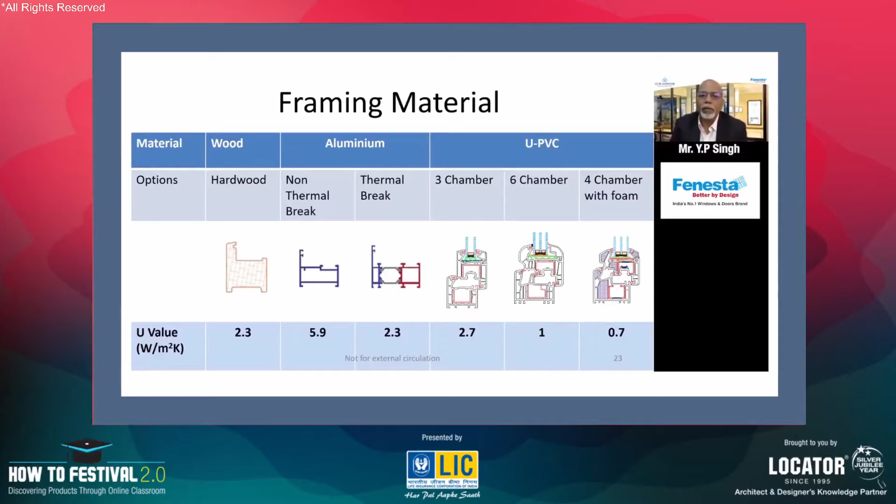Lower the U value, better is the insulation. So keep that in mind. Now, if you look at wood, which is at 2.3, you get thermal break material in aluminum also at 2.3, and you get 3 chamber close to 2.7. Of course, you can go lower by adding chambers or adding foam, but that's what you are aiming at. In Europe, particularly where they are looking for very high insulation, they go for 6 to 7 chambers as well.

We'll talk about some of these innovations at Fenesta. The first one is we have a special rain track and sill arrangement to prevent water seepage through slider systems.

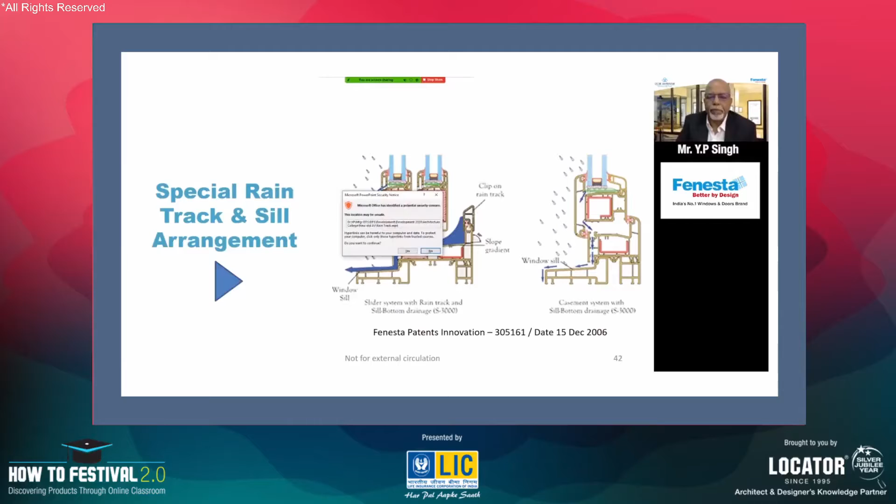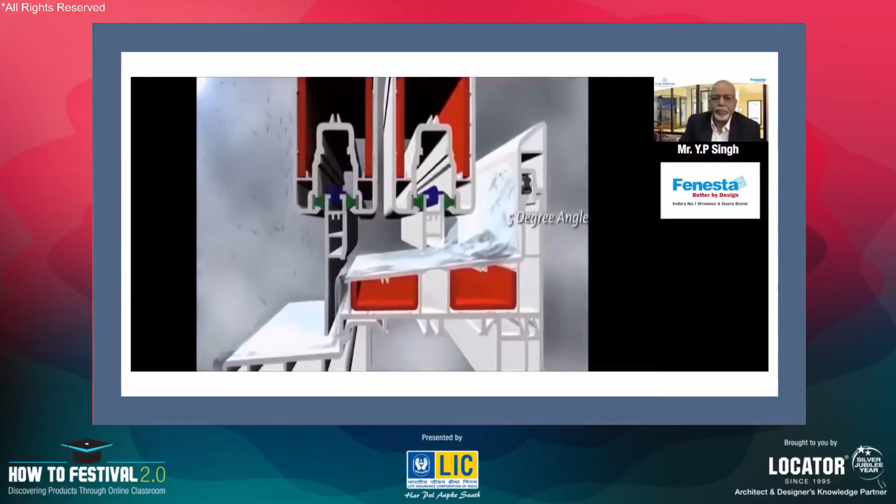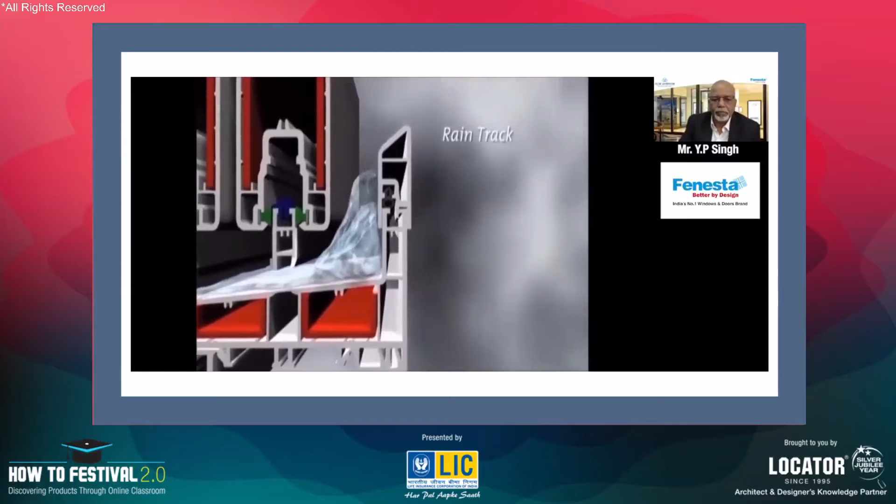Fenesta windows come with both watertight sealing and special monsoon-proof innovation. For heavy shower areas, Fenesta offers sliding windows with a special rain track, dam-like system, which locks out the rains completely and prevents it from seeping indoors. Whereas for light shower areas, a sill arrangement is recommended, which resists air pressure and makes the rainwater flow outwards without staining the walls.

As we have designed and manufactured the product, installation is the most critical aspect because this is done at the field with less supervision, but with a trained set of skills. If the installation is not correct, irrespective of how good the design is or how good you have manufactured, the windows will not perform. Therefore, due care in the installation process has to be taken.

Fenesta has been doing its own installations from day one, and the main reason is that installation actually delivers the performance of the product. Let's have a look at this.

The other is installation. 85% of all window-related problems spring from poor installation. At Fenesta, dedicated teams of trained professionals coordinate the complete installation process.

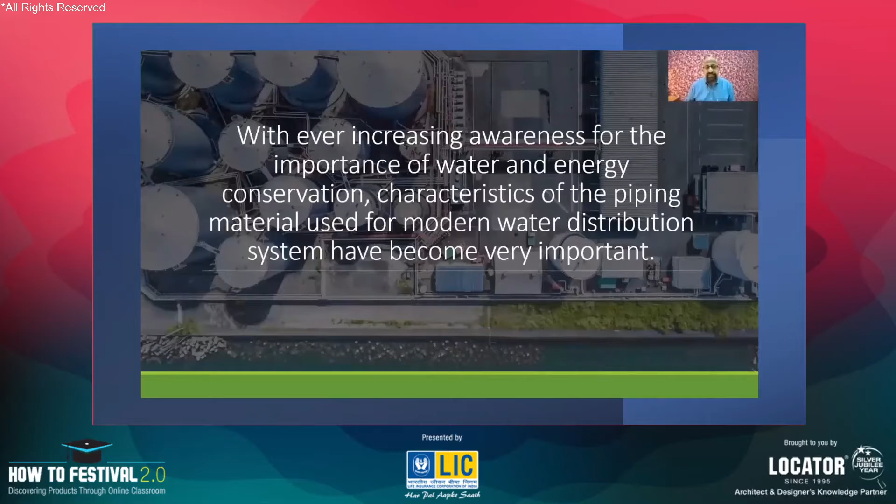There are a lot of ways that traditionally water pipes are used for transport of water. Namely three: GI, copper, and plastic, and a few others. Mostly it's GI. GI is the product of choice, and this is the one you'll probably find in your homes and use in your university, in your college, virtually everywhere. That's because it is the one pipe which has been made available for the longest time all over the country.

Copper is another option which used to be used in the Baba Adam days, in the British days, because it was freely available and less expensive. Today it's prohibitively expensive. It's a great product to use for piping, but it's simply not affordable in projects. And there is plastic, which is very affordable, but as with anything, it has its major disadvantages of being brittle and prone to breaking, cracks, breakages, and all kinds of other problems such as not being able to take hot water applications easily, and so on.

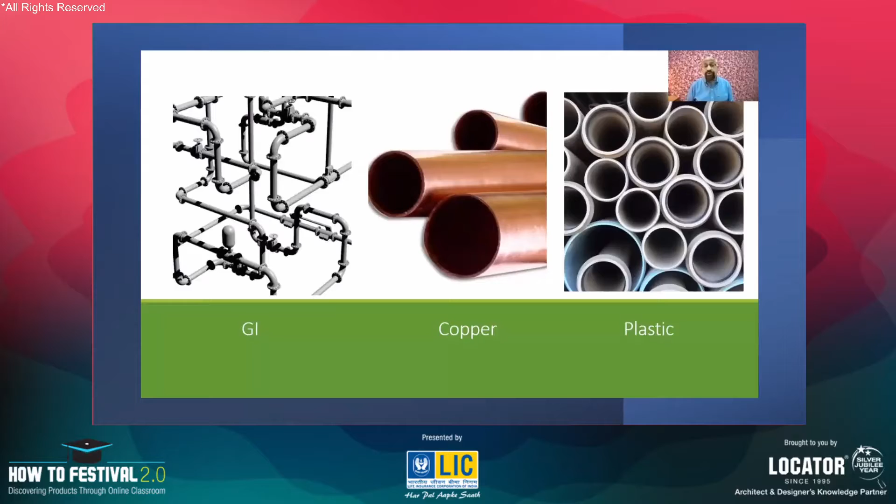All of these main products which have been used have got limitations because GI pipes tend to corrode. GI pipes come in fixed lengths of a few meters. They have to be cut to size, measured, threaded, wound, and the angles and joints have to be put together. It's labor intensive, and at the end of the day, they're prone to leakages from those very joints, which have been sealed using tape or sutli. Remember how plumbers do their work with white cement and so on. And they have all got limitations.

So that's why I think you need to know about this revolutionary system that combines the features of both plastic and metal, the composite piping system from Kitec.

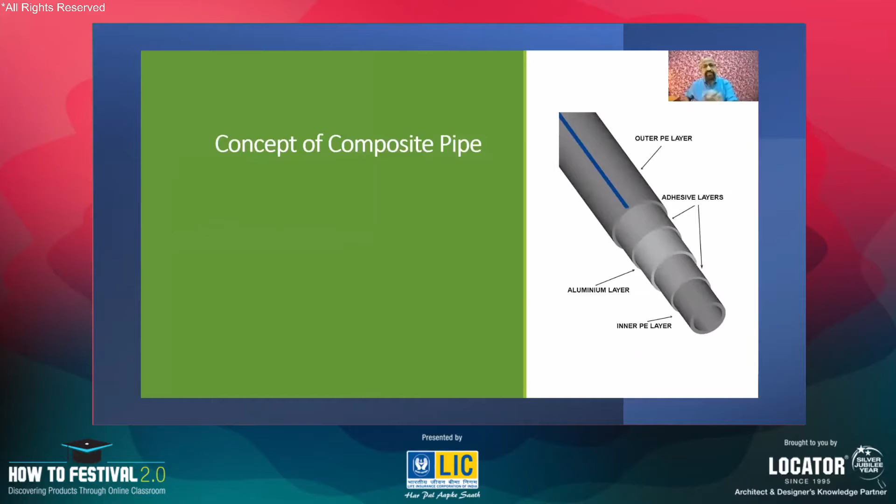What is the concept? Here you see 5 layers. There's an outer PE layer, there's an inner PE, PE being polyethylene, and in between there's an aluminum layer. There are 2 more layers between the outer PE and the middle aluminum - an adhesive layer - and between the middle aluminum and the inner PE, there's another adhesive layer. So Kitec is an aluminum polyethylene composite that combines the best features of both materials to form a pipe that is light, strong, and does not support corrosion.

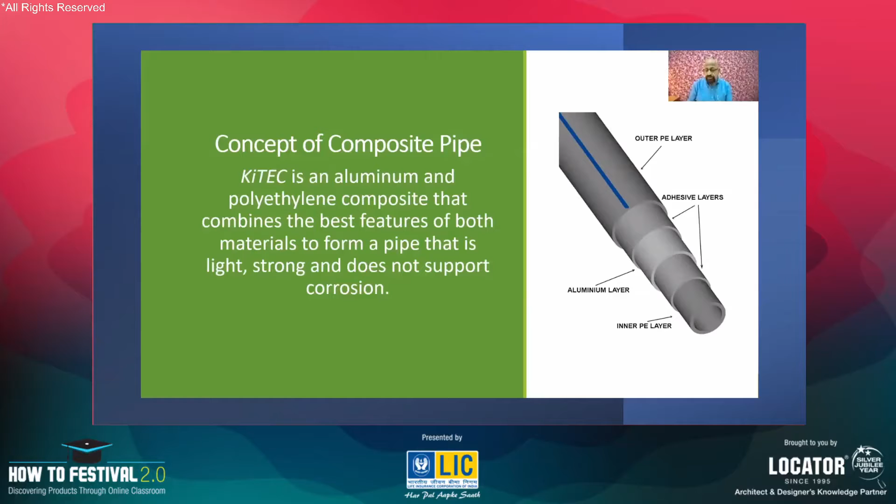It is potable water certified. Potable water is drinking water. We all know that all over the country, you're either finding people with so-called mineral water, which is basically treated, filtered water, bottles in their hands, or you've got AquaGuard kind of water purification systems at home and even in institutions. Why is that so?

The reason is very simple. The groundwater is not so contaminated - even if it's from the lake or rivers, it gets treated in a plant - but it's during the transport from the pumping station to the end delivery point, which could be a building going up to many flats, that contamination becomes possible. How does this happen? Sewage pipes and drinking water pipes are normally laid together in the same trenches. This is how cities were constructed.

So when there's a leak from one or the other, because of those joints I mentioned earlier, because of the corrosion of those joints, because over a period of time they weaken, dirty sewage water goes in, which is why at the delivery point you're not advised to drink water off the tap. Go to all advanced international countries which have these kind of sealed systems, and they drink water off the tap because it isn't contaminated.

KiTEC pipes use PE that is food grade certified and hence suitable for water supply to and inside the building. So if you have applications in the future like hotels, hospitals, colleges, etc., this danger is real, and that is where one needs to be careful to ensure there is no contamination of drinking water, which can be avoided if you use KiTEC composite water piping systems.

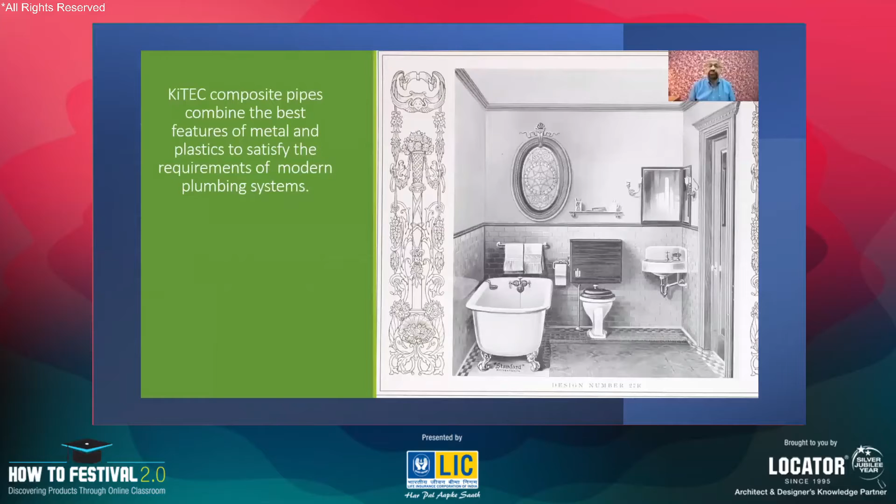So, more or less concluding, KiTEC composite pipes combine the best features of metal and plastics and satisfy the requirements of most modern plumbing systems. There's a wide range of municipal DZR brass fittings and engineering plastic composite fittings available to connect KiTEC water service pipes. Let me show you something interesting. This is a range of fittings which have been developed indigenously, vocal for local. It has been made by KiTEC, and it includes composite, brass, and other metals, O-rings and whatnot.

None of this is important to you. Suffice it for you to know that unlike the normal metal GI pipe, where we talked about cutting lengths, there being some wastage, threading after measuring the lengths to which it has to be taken, then fitting the elbows and so on, KiTEC composite piping systems are literally fitted. Because of these fittings, they are airlocked. They don't need adhesive, they don't need rope, they don't need threading, they don't need sutli, they need nothing. They are snap shut, and that entire project is tested with compressed air before water is allowed to flow through the system. And that is how you can say you can fit it and forget it for life.

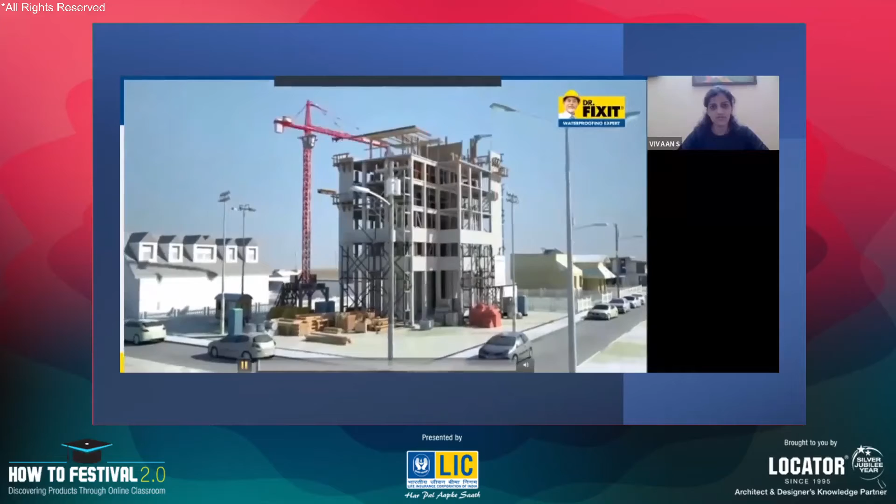It takes years of design and planning to construct a strong building. Unfortunately, not much has changed about waterproofing. Conventional methods like brick-bat coba and China mosaic are often considered sufficient, but weather can be unforgiving.

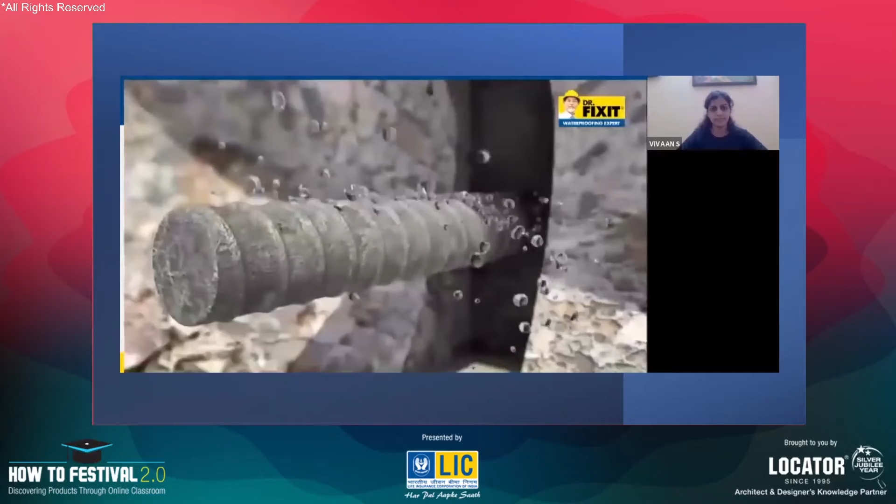Rapidly changing weather and temperatures throughout the day put a lot of stress on the building. This harsh weather adversely impacts the concrete structure and weakens the building. Water can be an extremely destructive force. It can slip through the tiniest cracks, cutting its way through every crevice that could be found, percolating through the concrete and destroying everything in its path. And when it enters a house, it damages the ceiling, walls, floors, and the interiors. But it is possible to stop all this damage from happening.

So these are the waterproofing principles and facts related to this. When we consider the life cycle analysis of the structure, it has a principle called the 2-80 principle. The 2 stands for the 2% that is the total waterproofing material cost of your total project cost. That much is your requirement at the initial stage itself. But if we do not consider this at the initial stage, it leads to 80% cost for the repairs of the project during the service span of the building. And 18% is related to other factors.

Similarly, as a life cycle analysis, we should also have a failure analysis of the waterproofing systems. This also has a principle—the 2-90 principle. Here again, the 2% remains for your waterproofing system material selection, and 90% is the application of these materials. So this is important—both the system material selection and their application—and 8% is for other factors. This gives you the overall idea about waterproofing practices, their principles, their life cycle, and the cost analysis of the project itself.

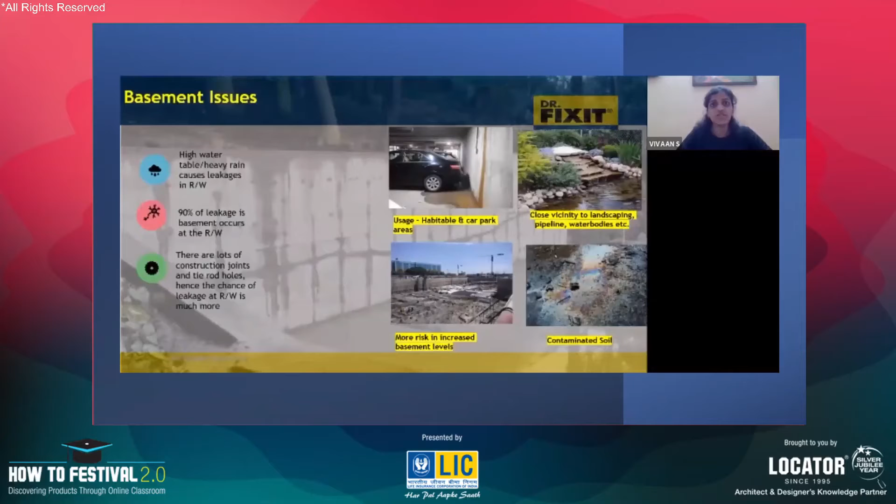It all leads to basement leakages and dampness problems inside buildings. To protect basement structures, proper waterproofing should be done at the design stage itself with the proper system selection. First we have to understand the purpose for which we are going to use the basement—what is the grade of the basement usage? Are we going to use it for car parking, storage, or plant room areas? Depending on the grade of usage, the nearby soil condition, and the water table condition, it has to be derived into 3 categories.

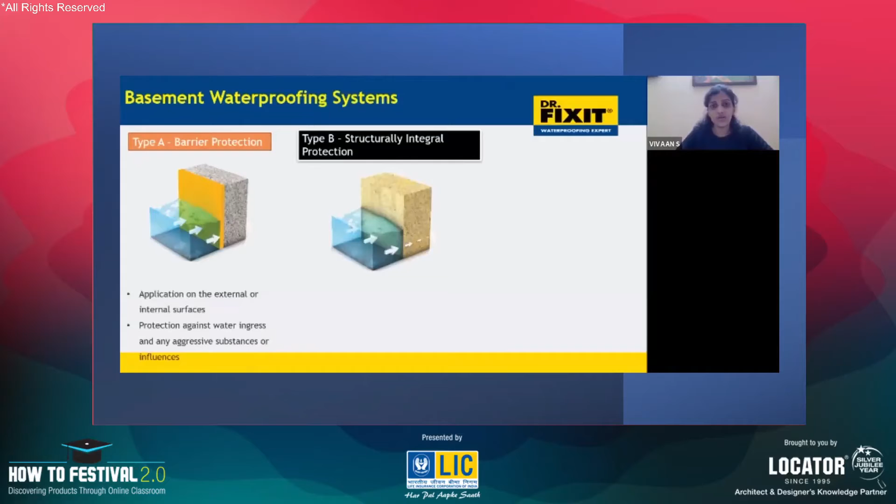One system is called the Type A barrier protection system. In this waterproofing system, the material has to be applied either from the external or the internal side of the concrete mass. The second category is called structurally integral protection. This is nothing but making your concrete waterproof—we add integral waterproofing compounds inside at the time of making the concrete.

And the third category is drained protection. Here we provide drainage boards inside the basement from the internal side, so that water will percolate and be stored at the drainage board, and we collect it from a sump at one location on the project site. So as per the basement grade, usage and water table conditions, these three categories can be combined or used singly on the projects.

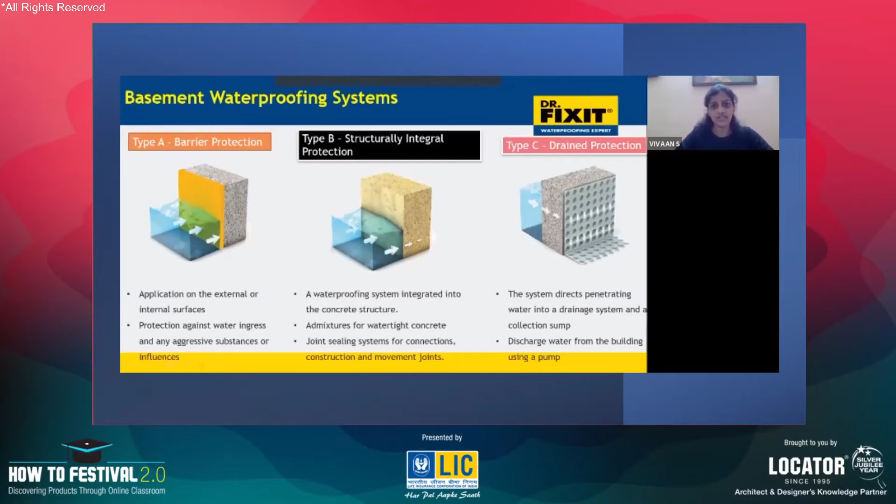Let's see about podium waterproofing. As podium itself is a big subject, we are going to use this as we have various utilities over here, each with their associated problems.

We use the podium substrate where you have various loading coming due to expansion and contraction, and the concrete slab gets crack formations. There are also other utilities like water bodies and planter boxes. In planter boxes or landscaping, plant roots also penetrate inside the concrete mass. We also use this as hardscape for car parking areas. So these are the utilities.

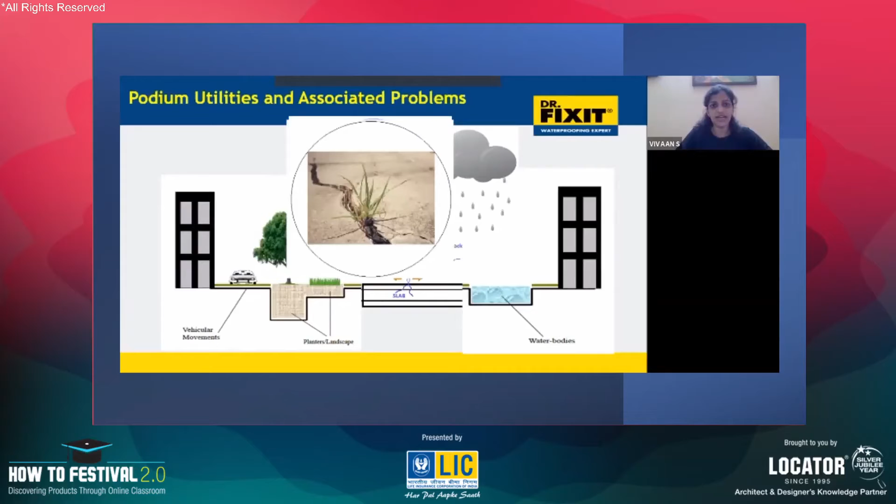To cover all these utility points, the system has to address all these utilities at one go and their problems at the initial stage itself. So for the hardscape system, the waterproofing membrane has to take care of good tensile properties, adhesion properties, and elongation properties to handle all these thermal stresses. This concrete membrane gets covered with a protection screed along with control joints.

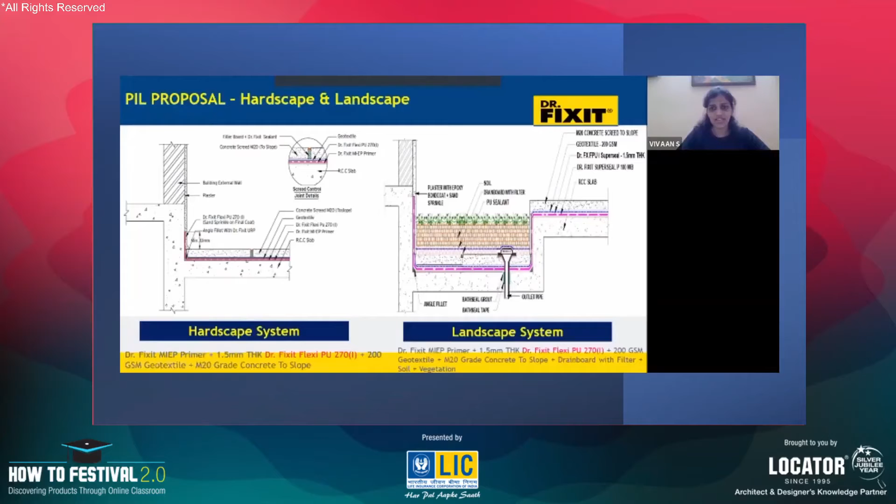And if you are providing the landscape or planter box system, then they add the waterproofing membrane below the soil mass, along with proper positioning and fixing of the features. With drainage pipes, then the drain board, soil mass, and vegetation growth will come up.

This is a simple application process which starts from surface cleaning. Then if there are cracks, we have to repair them. At the wall floor junctions, we have to provide angle fillets. If we have various upstands and pipe penetrations, then the water outlets have to be detailed properly at the time of application itself.

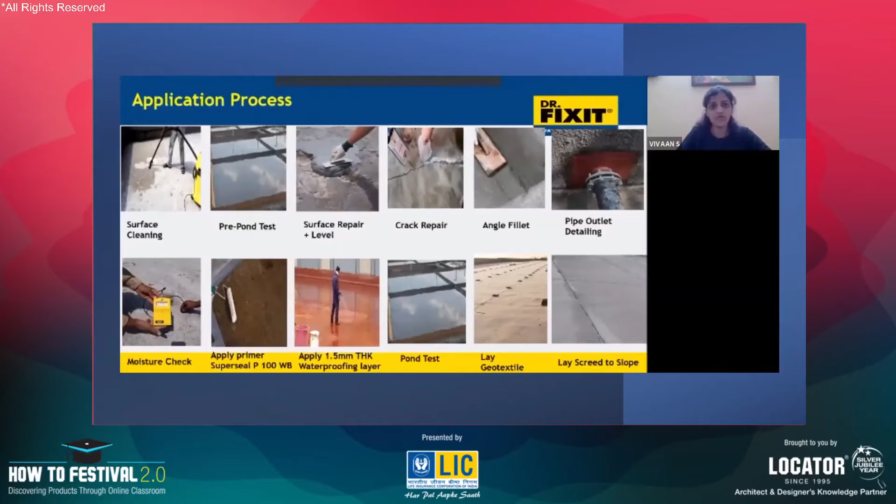The application of the waterproofing membrane is either in the form of coating, spray, or squeegee pad applications. Once the coating is done, we have to go for a ponding test to check that water is not leaking from any substrate or from the coating itself. Then the coating is covered with geotextile and concrete screed, and the concrete screed has to be laid in the form of a slope towards the drain outlet.

Coming to green buildings and sustainable buildings, we also have green ratings. To achieve that, we need insulation along with the waterproofing systems, serving a dual purpose, and we should apply a low energy conservation system. To optimize this low energy conservation, we first need to understand the U value and R value of the buildings and surroundings, and on that basis we provide PUF formation or foam formations to minimize the temperatures.

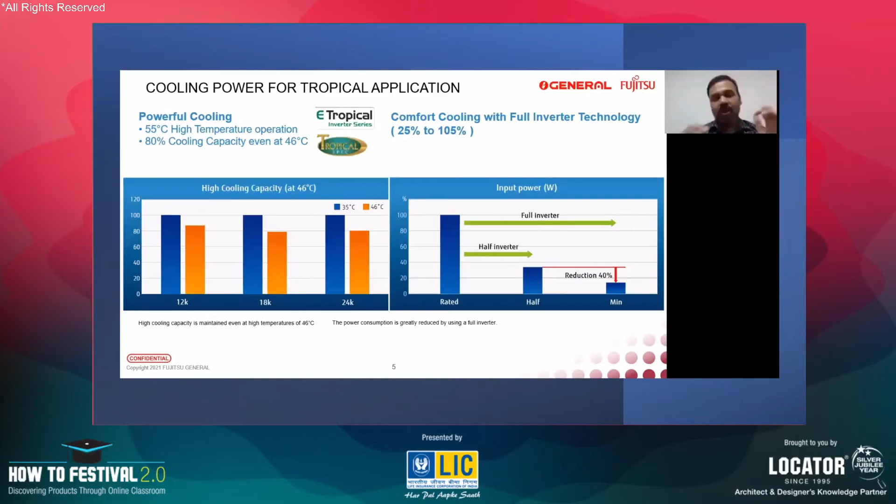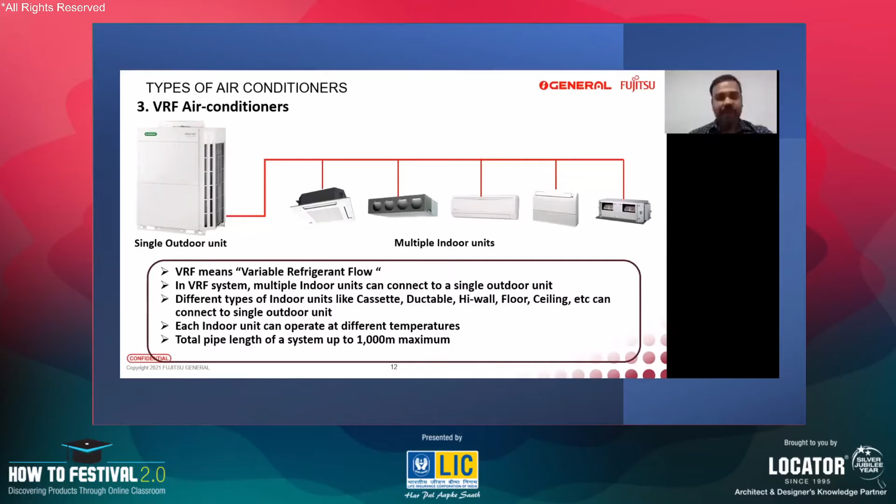The beauty is, even though you have multiple indoor air conditioners connected to the same outdoor unit, each indoor unit can be operated at different temperatures. You can set different temperatures for different indoor units. This is ideal for large buildings, showrooms, and malls where large distances are involved, because the piping length between the indoor unit and outdoor unit can be as high as 1,000 meters. These are the advantages of VRF air conditioners.

There is also inverter technology that is completely transforming the air conditioning industry. The government, through the Bureau of Energy Efficiency, has given impetus to this inverter technology because it results in energy saving—every kilowatt saved is one kilowatt cost reduced. So there are certain benefits that inverter technology provides.

I'll get into the benefits and then tell you how those benefits are achieved. The main benefits are faster cooling, energy saving, and comfortable and stable cooling.

We all know that in a normal split air conditioner, once you set a temperature and it is reached, the compressor cuts off. Once the temperature increases by about 1.5 degrees from the set point, the compressor turns on again and cooling restarts. So it's kind of on-off, on-off—that is the system we used to have all these years.

What inverter technology has done is that initially, when you switch on the air conditioner, it cools very fast—almost 50% faster than a conventional air conditioner—so you achieve the set temperature in much quicker time. Once that set temperature is reached, it will not cut off immediately. Instead, it will reduce the cooling so as to maintain the temperature at the same level.

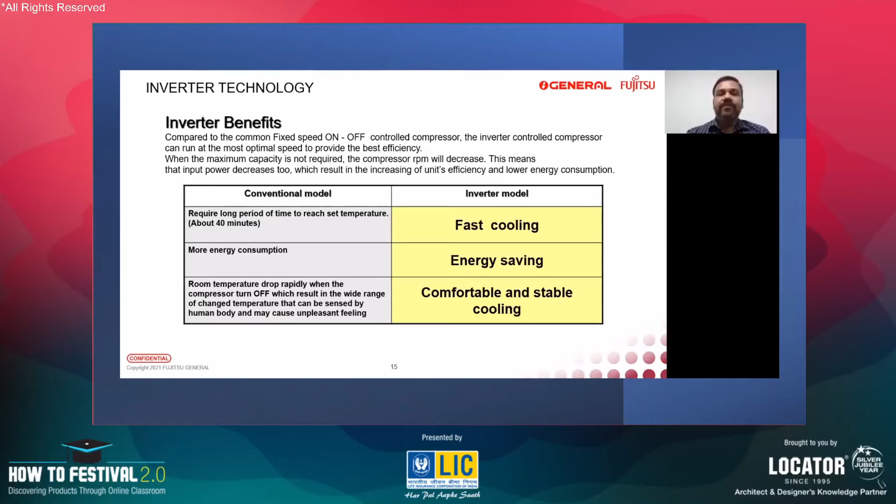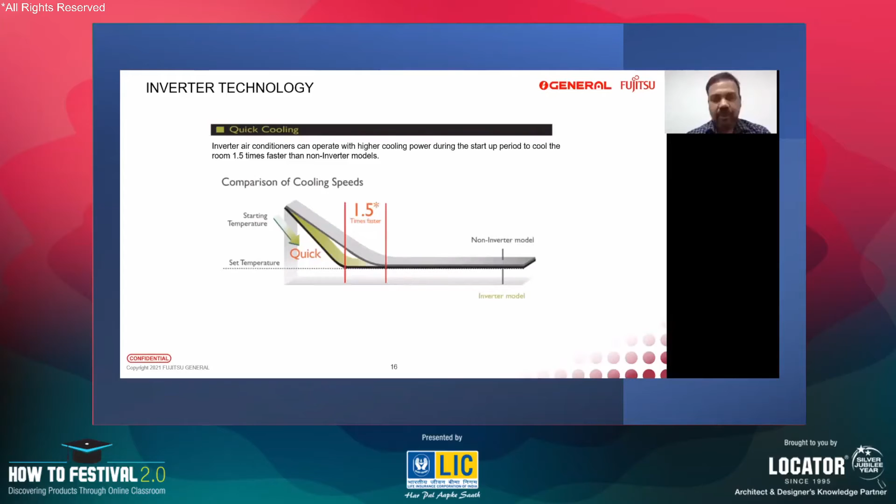So this is what I already explained to you, the comparison of cooling speeds. The initial cooling is 1.5 times faster than a conventional air conditioner to reach the set temperature, and it reduces electricity consumption by varying the speed of the compressor. In some cases, the energy saving is even as high as 50%.

And this is not something I'm just saying. If you actually have a normal air conditioner and an inverter air conditioner at home, and run them for the same amount of time over a month or two or three, you can actually see the difference in your electricity bills. So there is direct benefit.

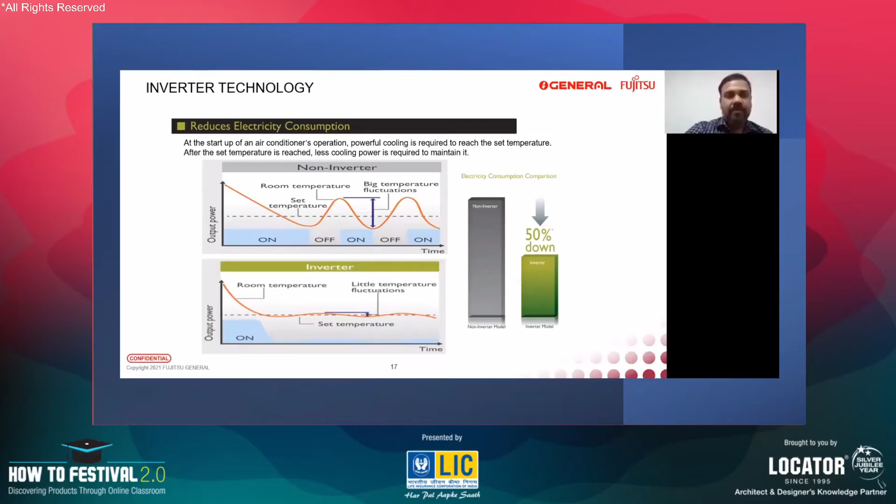Coming to the outdoor unit, do not install it in a confined space. We all know that the heat from inside the room is thrown out through the outdoor unit. So if that heat is not able to dissipate, the cooling operation is inhibited. It affects the compressor, which can get overheated, then overloaded, and it can cut off. In extreme cases, the compressor can even get damaged. So there should always be enough space around the outdoor unit for air circulation, for the heat to dissipate.

If it is not possible, and there is a wall, it is always advisable to use wall brackets to raise the level of the outdoor unit so that there is enough air circulation reaching it.

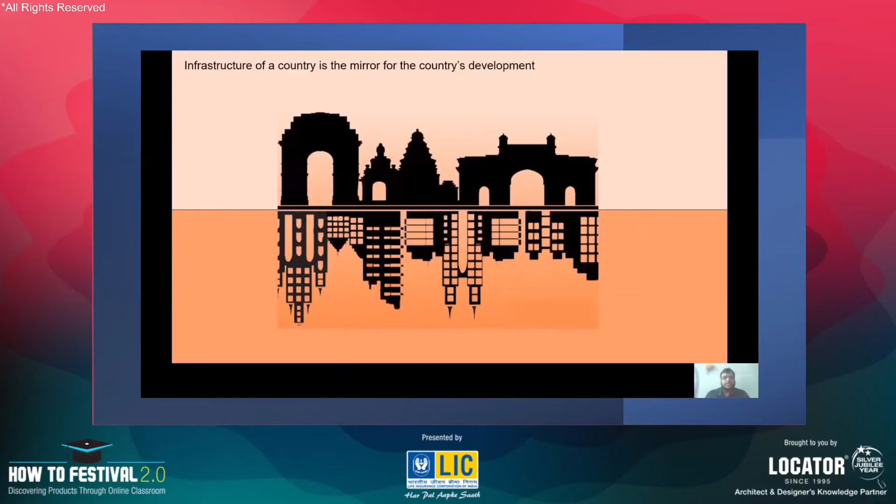So you think about all these established empires like the Greek or Roman empires - when you think about them, you think about pantheons or colosseums. When you speak about great Indian times, you'd like to think about the Taj Mahal or other great monuments. Why I'm telling all this is because the infrastructure of a country is like a mirror for that country's development. If a country is a developed economy, if its people are at a much evolved state, that automatically gets reflected in the infrastructure or architecture of that country. That's where the prominent architects and engineers come into play.

So today's infrastructure in India is much more evolved. Based on what we have studied, the architecture, both in terms of innovation of design and innovation of process, has gone miles ahead in the last decade. That's one brilliant move done by the architect community, who are playing a very critical role in building the modern and futuristic infrastructure of India - the new age architect community driving this forward.

So in order for something to materialize, someone has to dream. That dream and that mindset and that thinking is being done by the architect community, which is a very great thing. And you're all going to be part of the community very soon, walking in the same footsteps and taking the infrastructure of the country miles ahead.

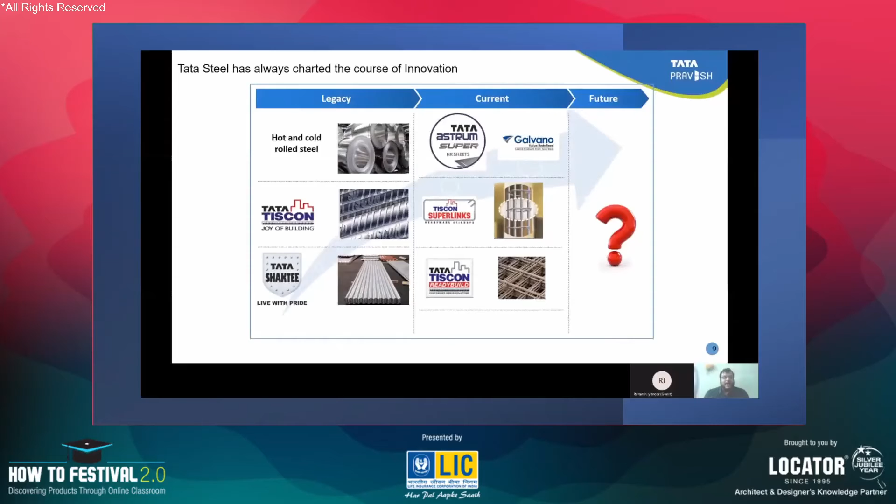What is the future? This is the constant question that we keep asking ourselves. What is the future of steel in India? Which products accommodate steel better? How can we better the innovation in the construction sector? So that's the question we always ask ourselves, and when asking about this, we stumbled upon a brilliant study that we could learn quite a lot from.

So we studied doors in particular across all countries - what type of doors are used, what is the technology behind the doors, how doors differ from one country to another. Because we study different building elements - we study a wall, a door, a window, a roof. So one of the construction elements we have studied is doors.

The other doors like UPVC or any other material is around 25%. If you see, China is the world leader in steel production, so the metal door usage is almost 49%. Wooden door is 23% and others are 28%. Whereas in India, metal door usage is only 15%, wooden door usage is almost 82%, and others are around 3%.

So there is quite a contrast between this data. Why is it 82% in India and only 37% in the US, or only 23% in China? One easy answer is that these are developed countries, US and China, so they are using more advanced products, and India is not.